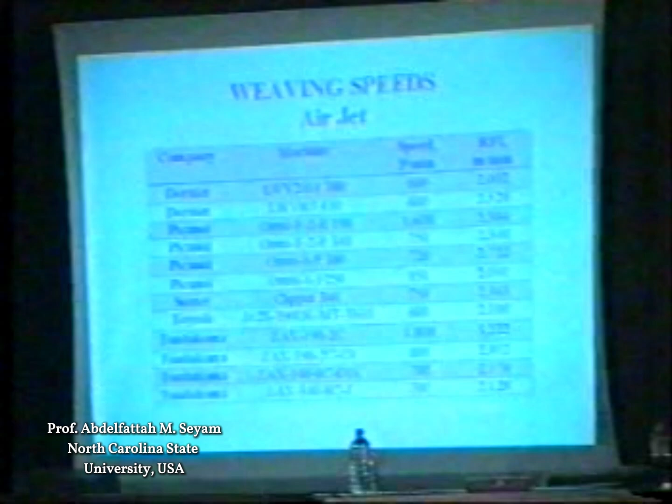Talking about speeds, we used to see 2000 as the rate of filling insertion - that was a barrier. This barrier was broken in '95 and '99 at ITMA. I'm showing you here many of these companies, top weaving machine producers, breaking this barrier. You can see that we have reached over 3,000 rate of filling insertion. This is the amount of filling yarn that's consumed in 1 minute - that's an indication of production, and it's independent of the weaving width. So you look at this number, and when this number gets higher, you know you are producing more fabric. This is about speeds - that was air jet.

Water jet - we have more than 2,000 by two companies. If you talk about rapier, the 1200 and 1300 was a barrier. That barrier was broken.

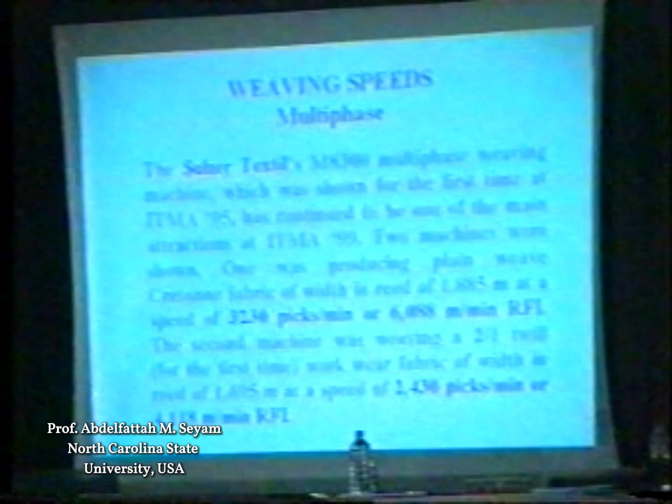Higher speed - and then we have seen a revolutionary technology in weaving that took the speed from 2000 to 6000. That's what you see here. Multi-phase weaving uses multiple sheds. So you are doing 4 in this technology, developed by Sulzer. You're doing, by air jet, 4 picks at the same time, which increases production about 3 times as compared to single phase, which I showed you prior to this slide.

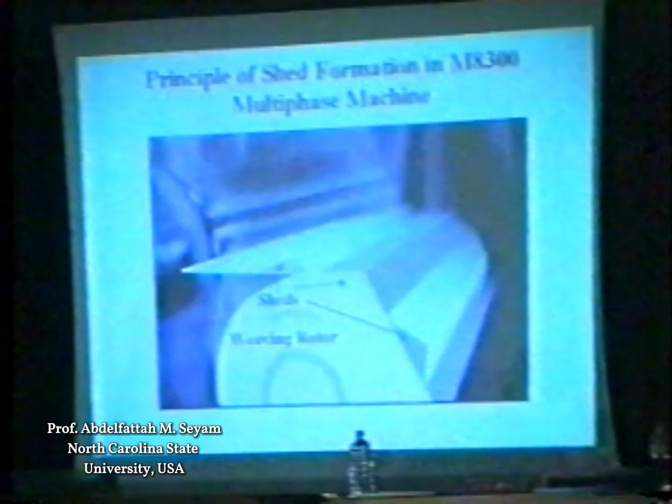And this technology, if you look at it, is a new principle in weaving. Instead of the traditional reciprocating motion to form the shed, you have a rotating motion to form sheds on a weaving rotor. And around the rotor, you will have 4 sheds ready to accept filling yarn.

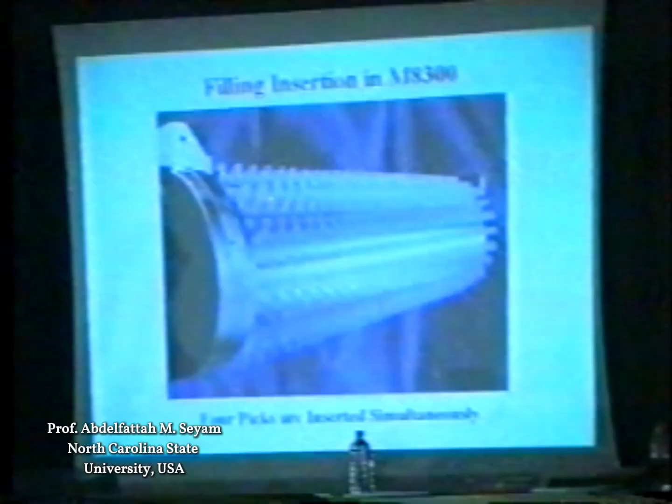Continuous insertion on the 4 sheds is done through an intelligent way of forming a shed, using warp guides, to raise the warp or miss the guide to put the warp yarn down. You can see here we have 1, 2, 3, 4 sheds, and you have a slot on every guide that will allow the filling yarn to be released during weaving at the top. This is a real machine, and here are the sheds - you can see number 2 and number 3 in this picture, but like I said, there are 4. This is showing you, in red, across the machine - you have 4 filling yarns inserted at the same time, and they are a quarter revolution out of phase.

For example, this pick here made it all the way. This pick here is 3/4 of the way. This is halfway, and this is 25% of the way. And this is happening simultaneously - all the time, when you picture this machine at any moment, you would see 4 picks inserted simultaneously. This is another view of the same thing.

This technology appeared in '95, and they showed it to run at about 6,000 rate of filling insertion. Using the rotating motion, it is expected to be more than that. From 95 to 99, they were able to increase the speed a little bit.

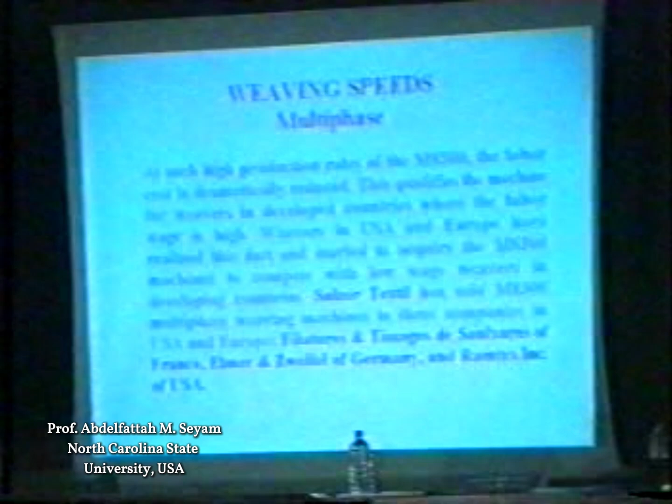I believe this technology will enable the developing countries to compete with the developed countries. And you can see that 3 companies already have this machine. 2 countries in Europe and 1 plant in America are using this machine and trying in production line to produce commodity fabric. The limitation of this technology is that it just uses simple weaves.

It can produce simple weaves. What they do now is plain weave and 2x1 twill. And if you look at the design of the machine, you can see this is not going to be any better than that. It's going to be limited to simple weaves. And this makes the machine limited to commodity fabrics, high speed production for commodity fabrics.

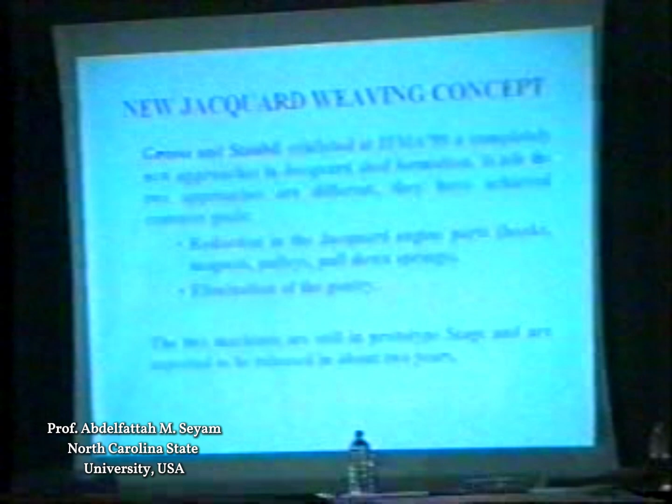Looking at jacquard. 2 machine manufacturers produced a new jacquard concept. By that concept, they were able to put the jacquard machine right on the machine, just like any dobby mechanism. Instead of building a gantry to put the jacquard head on top, you just merely need to put it on the frame of the loom.

And in this way, they designed it so that you can reduce the machine parts, so the machine can be faster. And also they elected to have every warp yarn controlled individually. So every single warp yarn is controlled by a hook, or equivalent to a hook that we used to have or know traditionally in the weaving industry.

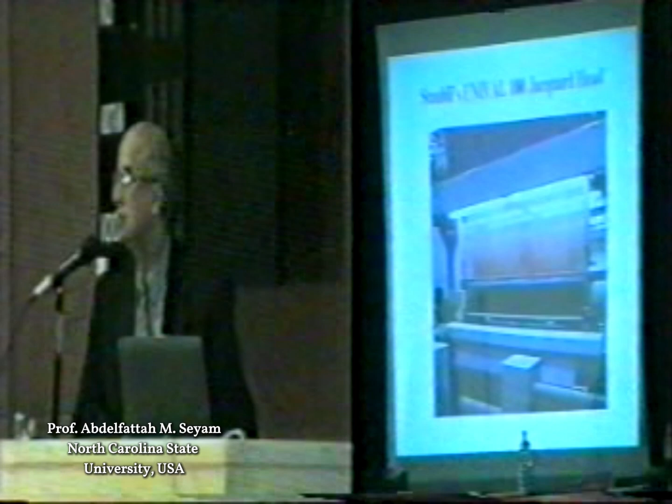So this machine has 7,000 little stepping motors that are controlling the shed opening of the jacquard machine. That's another view from the top. You can see that the jacquard head is on the top, right on the top of the frame. And here is a traditional jacquard. You can see how high you need to put the jacquard because of this slope here. If you don't have the jacquard head as high as this, you will get an unclear shed. That's why you have to raise it up.

Versatility was taken care of in the last 10 years, 12 years. So Dornier presented this in 95 and 99 - in 99, Dornier was the only one to present this. But in 95, many of the machine manufacturers showed quick style change. And with quick style change, they changed the entire style in 30 minutes. 30 minutes, that's all what you need.

And this setup, if you acquire such technology, it sets you up for short runs. You can switch from style to style in no time, 30 minutes. Traditionally, or if you don't have quick style change, you need probably 5 hours to one shift to change the style.

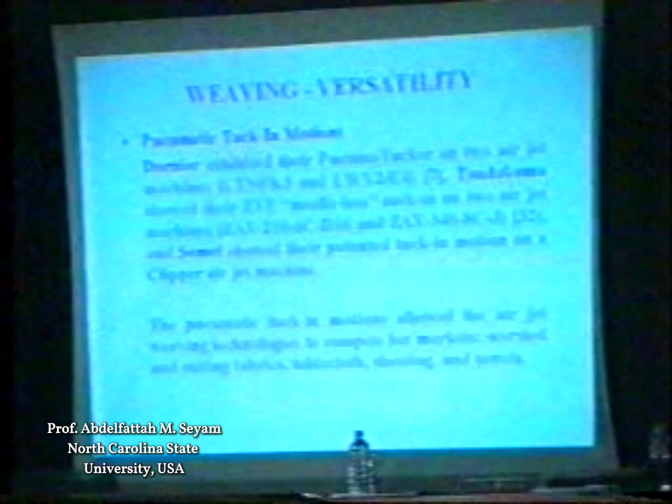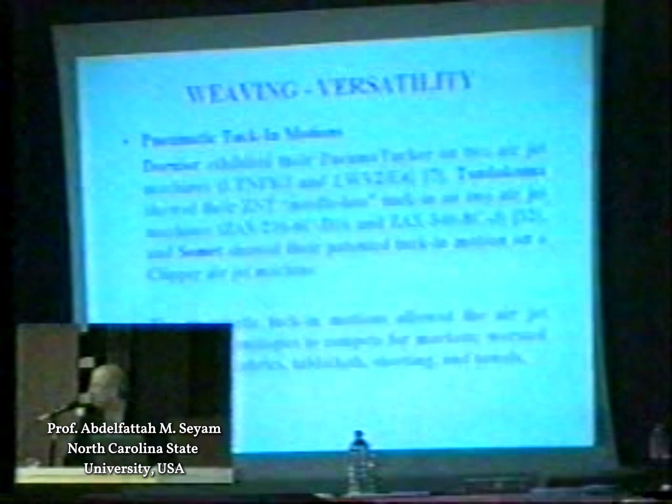The pneumatic tuck-in is normally done by needles, mechanically. We now have pneumatic tuck-in in about 3-4 companies, so you can speed the machine at air jet speed. If you have an air or air jet loom, you can use this. Instead of putting a needle to slow down the machine, you have air, which is faster than the needle mechanical parts. This allowed the air jet to enter a new market that it was not competing in before.

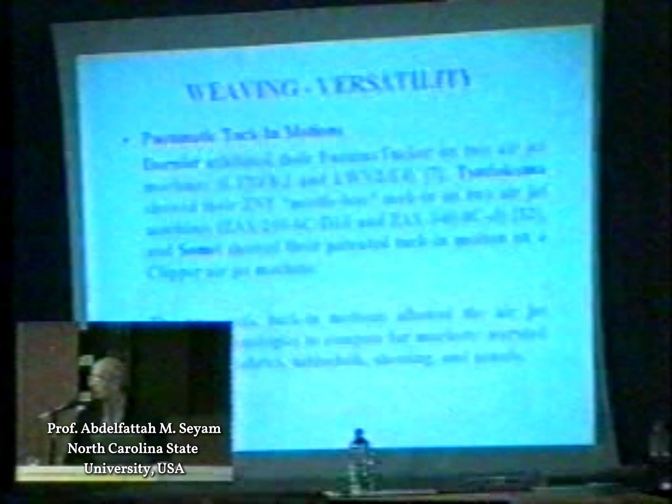So air jet looks like everything is going air jet. You can put electronic jacquard on air jet. You can weave multi-phase weaving on air jet. So keep this in mind for the moment.

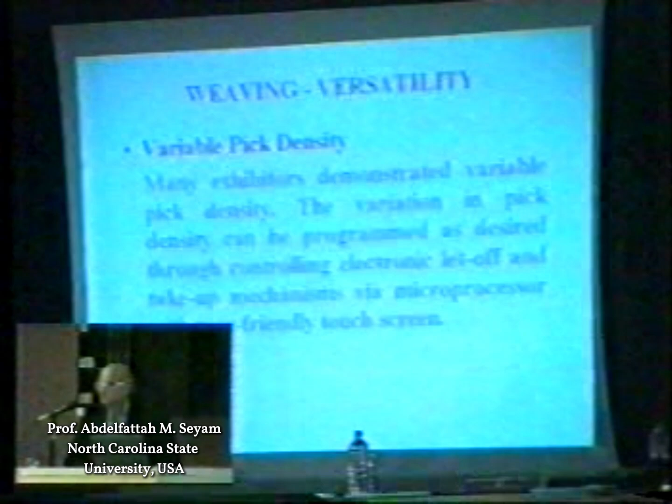Variable pick density is now available in the market. A machine that can make the take-up and let-off variable, so you can weave thick parts or heavy parts and light parts on your weaving. We used to have this in the vertical direction by doing different denting. Now we can do it in the horizontal direction, so we can get fancy effects.

All this versatility is at your hand now. If you can invest, you can get it very easily.

Start mark prevention. This is a quality problem. If you leave your loom for a few minutes and start it, it will have a start mark, or what we call sometimes a stop mark. It could be a heavy mark or a light mark, and this is a major quality problem.

If you are in the business, this is 4 points. This is the highest number of points that you give your fabric quality defect. We range it from 1 to 4. So this is major, and if you have 4 of these in 100 meters, your roll is automatically second quality.

So machine manufacturers paid attention to start mark prevention, and it has been improved over the years, but it still needs operator intervention when you have a new style. Once the operator adjusted the machine and his vision looked and found no defect, the computer remembers what the operator did, and once the style is running again, the start mark will be prevented.

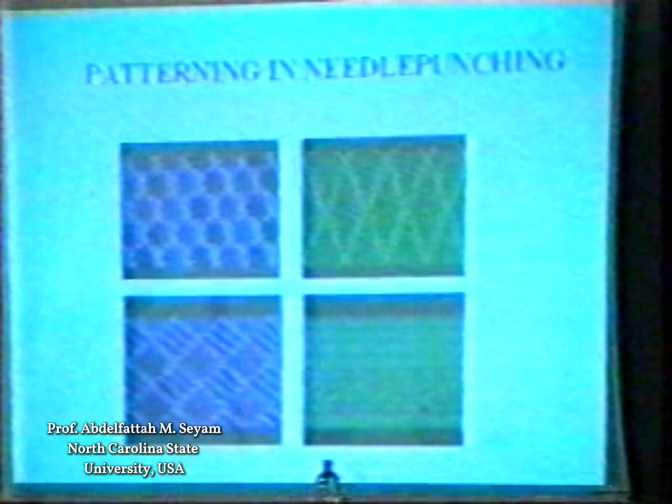In '95, a company introduced patterning. After you entangle your fiber web, you have special needles called structure needles or fork needles. If you feed two colors to this needle, with the needles arranged in a certain way, you could produce fancy effects. How many colors do you see per instance here? Two colors, right? It can handle two colors so far.

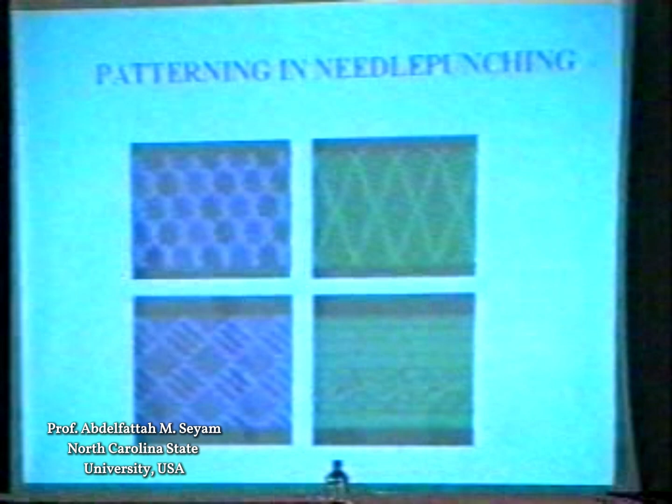And this is very challenging for carpet weaving. We can do carpet here.

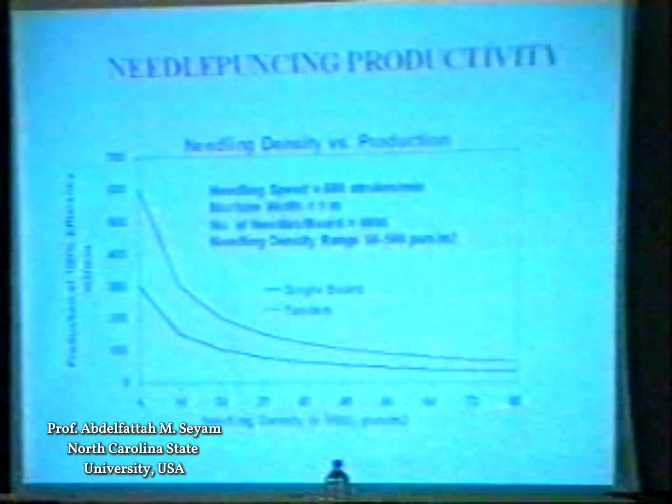What is the speed of needle punching? I've run some calculation on the speed of needle punching, depending on the needle intensity and whether you have a single board or double board. Let's say we have a double board, and let's say we have the highest needle intensity on this curve. It's 100 meters square per minute. For weaving, it's 40 meters square per hour. So do your math and see the difference.

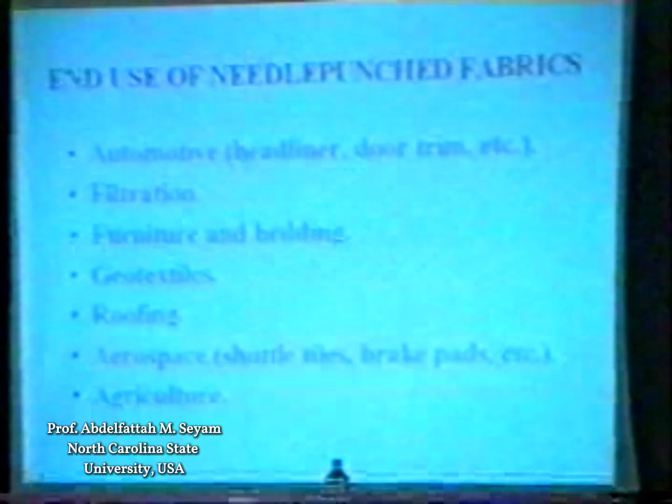I was showing here, I skipped this part. This is the end uses of needle punching, and these end uses used to be dominated by weaving before needle punching appeared on the scene. They go everywhere from agriculture to all technical textiles, and I can add to this list carpeting. It's there already, but carpeting is going to steal a lot from the weaving industry.

Hydro-entanglement. Hydro-entanglement is very similar to needle punching. Instead of using needles made of metal, you use needles made of water. High pressure water comes to the web and hits it at very high energy, and this forms the fabric integrity, entangling fibers together.

Whoever thought about the hydro-entanglement process had in mind that we need to produce a fabric that looks exactly like woven fabric or knitted fabric, but done with non-woven technology, at the price of non-woven technology—very cheap compared to woven.

Here is the principle of entanglement, or principle of copying the shape of what you see at the end of the process. We have water jets coming, and the holes for the jets are arranged side by side. So when you see an 8 meter machine, for example, you will see jets coming out of holes across that width of 8 meters.

This is a nonwoven web on top. On the bottom, you have what we call the forming surface or forming belt. That belt is made of wires, and it's woven, like woven fabric, but it's wire. When you hit the web with high energy water, the fiber will be displaced around these wires, and you will copy exactly the wire or the forming belt. So your fabric will copy the exact shape—it will be a negative copy, but if you have plain weave, negative and positive are the same, so you get plain weave appearance.

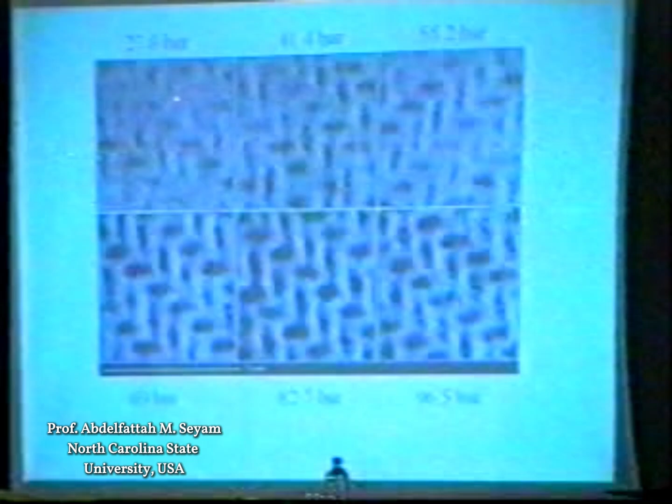This picture was taken by one of our students working on hydro-entanglement. You can see that by adding pressure to the gauge, at low pressure you get a hazy shape—you don't get the structure developed right. Until you find the right pressure and right energy, you can get the shape you're looking for.

If you exceed that, you again displace the fibers where you don't want them. I don't want to really elongate this more than that.

Recently, they developed items or articles for apparel that you wear every day.

Mr. Ken, can you show the audience the pants that's made of hydro-entanglement? And if any weaver comes to look at this fabric or this pant, I will ask you: what weave is this?

Many of you—I already met people and they said, yeah, this is woven fabric, woven fabric. Is that close?

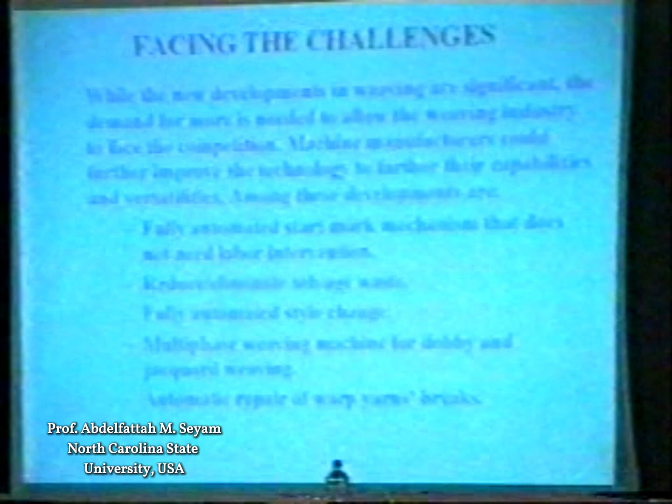When we worked on a project in 1972 on non-wovens, we were producing very stiff non-wovens. One of my colleagues sitting here was working with me on that project. We worked together doing non-wovens, chemically bonded non-wovens. That's what we knew at that time about non-wovens.

Today, 30 years later, it is completely different. It's coming strong, and it's going to take part.

What you need to do as a weaver is look at the limitations of these technologies, and you can do better. Today, you can weave on air jet weaving, the fastest weaving.

You can weave jacquard fabric in the case of single phase. Can the machine producer give me multi-phase that I can put on jacquard? Not yet, but this is a challenge. We need to do it.

Short runs—they cannot compete with you in short runs. They cannot compete with you in very lightweight fabrics. For the moment, for probably 5-10 years from now, like I said, the non-woven industry is thinking hard.

And I'm going to tell you one last thing: if you can't beat them, join them. Learn the technology now. Thank you.